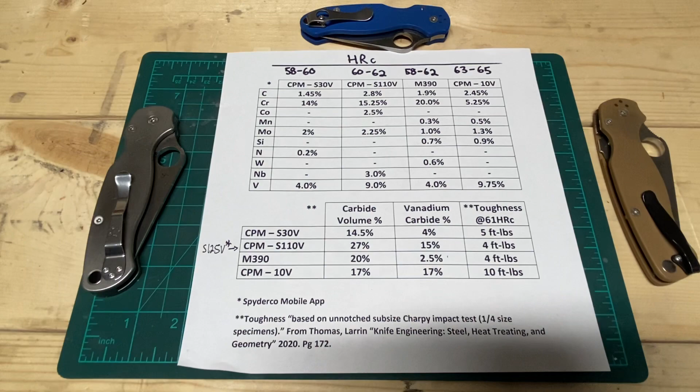S110V, made by Crucible. It is kind of the top dog in stainless steel right now, certainly whatever's done in production. I think it's been probably most popularized by Spyderco, which is what we have here, a Spyderco Paramilitary 2.

Spyderco does production runs of S110V in the PM2, Para 3, Military, Native Lightweight, Manix 2, and Manix 2 Lightweight, I think is all of them. So a lot of options. I don't know anybody else that's really working with it. I think manufacturers have kind of here and there, but nobody on the level of Spyderco, not even close.

So what's the deal with S110V? Why is it cool? Why is it not cool? And why might you want to pick it? Well, let's take a look.

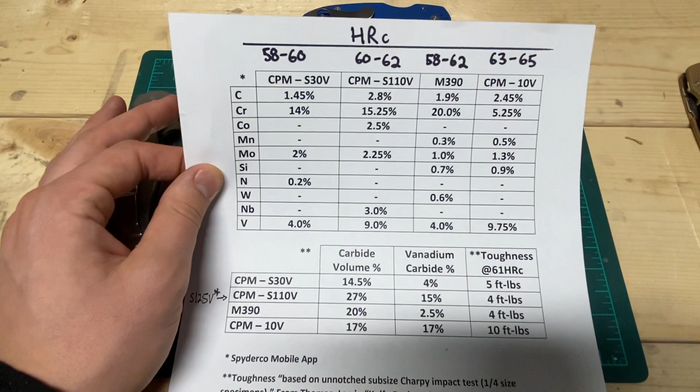So I smartly put S110V inconveniently in the middle instead of left to right, but we're going to work with it. So we're going to start with the composition. You're going to quickly see that S110V is not screwing around.

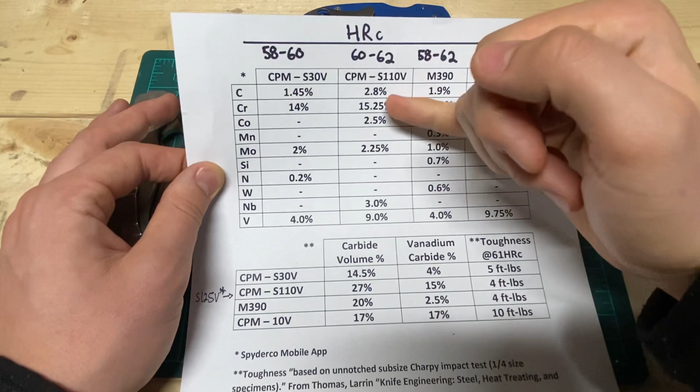So up front, we've got our carbon at 2.8 weight percent. And carbon is used for hardening the steel, of course, but it also is going to combine with some of the elements in here to form carbides.

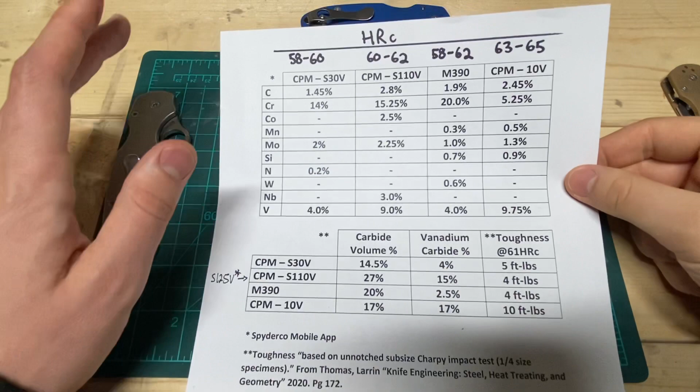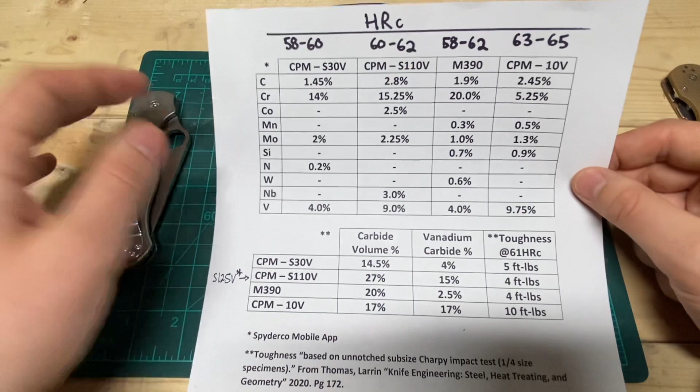We'll get to that. So you've got a huge dollop, 15.25% of chromium. That's going to be in large part for stainlessness, because the chromium that doesn't get bound into the carbides gets left out in the steel matrix so that oxygen can combine with it, making chromium oxide on the surface, and that's what prevents rust from happening.

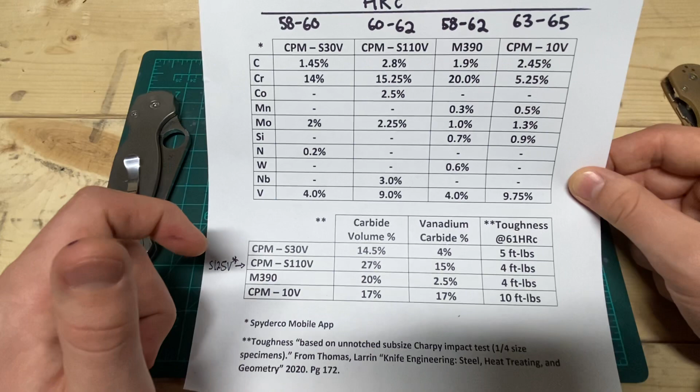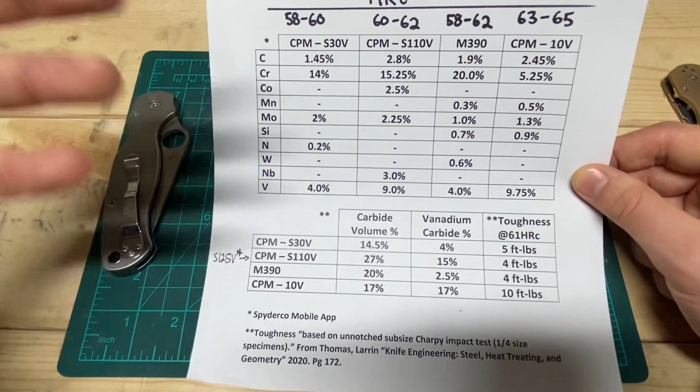You've got a little bit of cobalt here. I think that's added into the steel for a couple of reasons. One, I think, is it does help with heat treating the steel, making it a little bit easier to harden it. And number two is for hot working hardness.

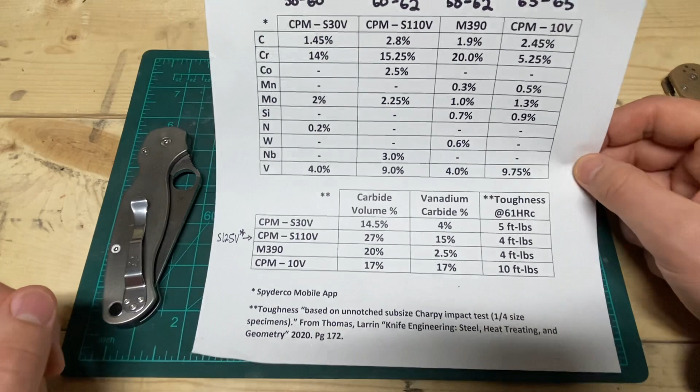S110V is a tool steel. I think people think of D2 when they think of tool steels, but this isn't meant for a knife. This is meant to be in some sort of drill bit or whatever—not drill bit, but tooling. So it's going to get hot, so they put a little bit of that in there to prevent it from softening when it heats up.

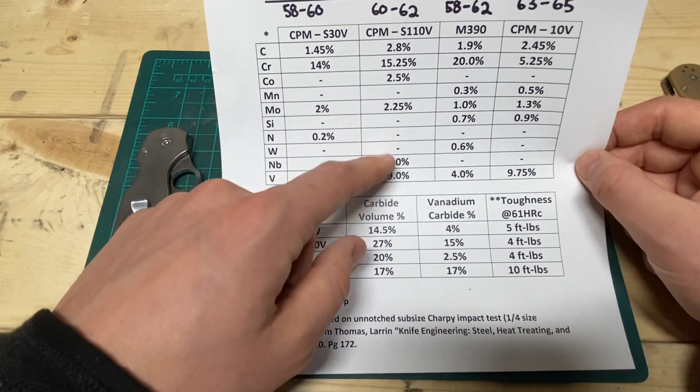Now you've got molybdenum. I think that's mostly for stainlessness. Once again, molybdenum is like chromium that'll add to stainlessness, but it won't soak up the carbon to form carbides quite like chromium will, not in these amounts anyways. I've never seen a super high molybdenum steel, honestly, past 4 or 5%.

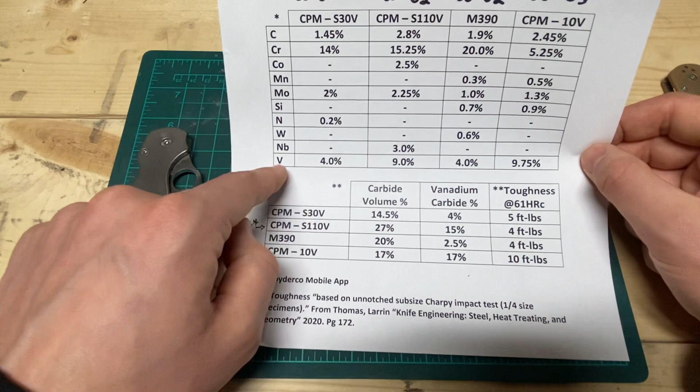Move all the way down to here to niobium. Niobium is a carbide former. It forms some of the hardest carbides and some of the finest carbides, just like its neighbor down here, vanadium, also just for carbide formation.

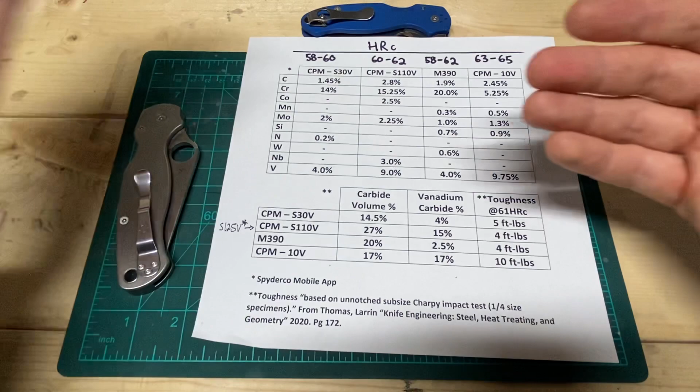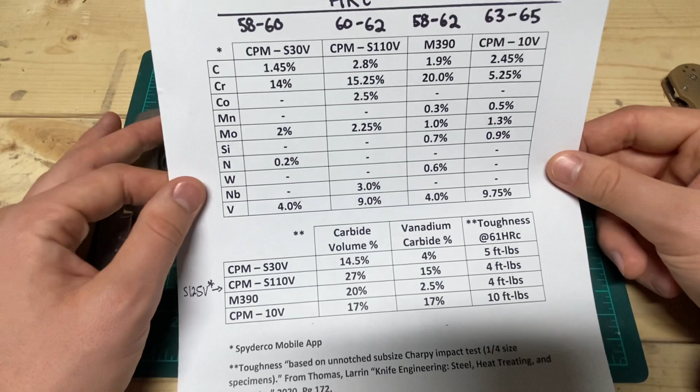And for those that don't know, all a carbide is when carbon, hence carbide, combines with another molecule—you just call it a carbide. But the bonds between the carbon and that other molecule are very strong, and you generate something that's super duper hard. And when you've got a very hard particle bound up in this steel matrix, it adds to wear resistance, because when you're cutting through cardboard, the cardboard can't abrade it very quickly. It slows down the wear, hence wear resistance. Generally, the more carbides you have, they'll add to hardness of a steel as well.

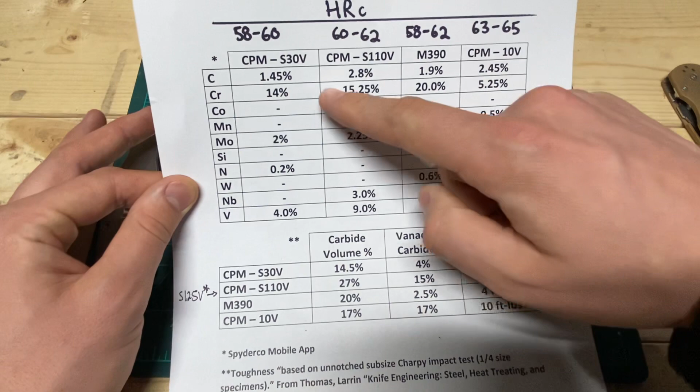So yeah, that's the composition there. Let's just kind of do a quick comparison to some of its neighbors here.

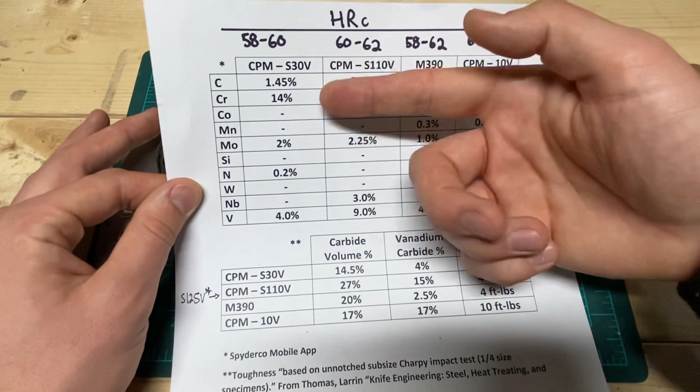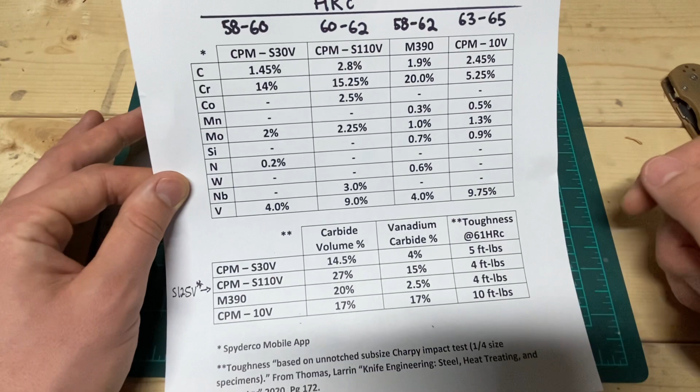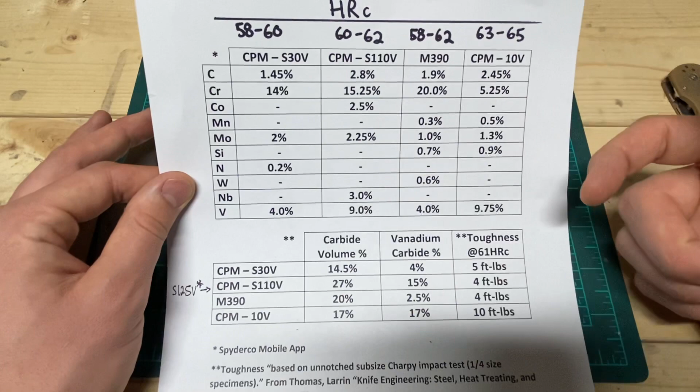So I've got S30V. Quick things to note: way less carbon. That means, as a ratio to the other things that'll soak up carbon, it has a lot less potential for getting hard and a lot less potential for forming carbides. It's got a similar amount of chromium, but less, and way less vanadium and no niobium. So you can see S30V just doesn't have the chemistry to form these ridiculous amounts of carbides, especially these hard carbides down here.

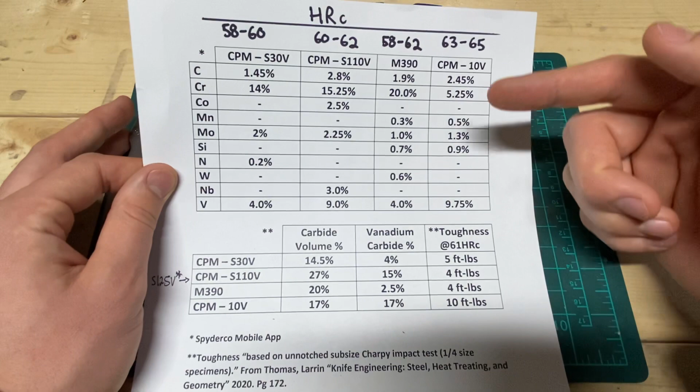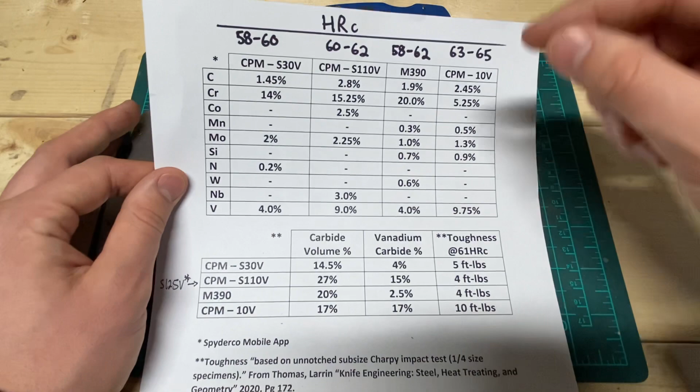Moving over to something like M390, which I think is a really good comparison to S110V. M390 is another steel that was developed as a stainless tool steel, and the intention was stainlessness.

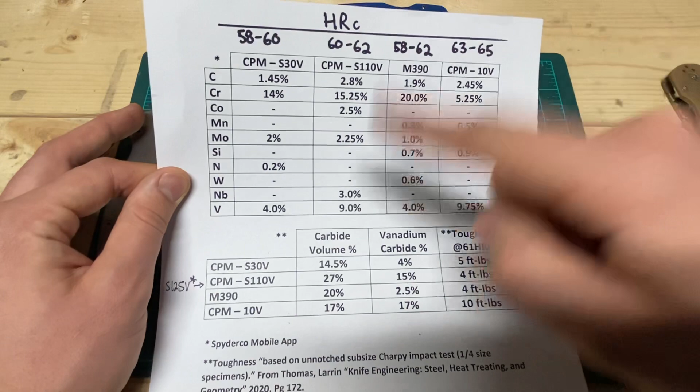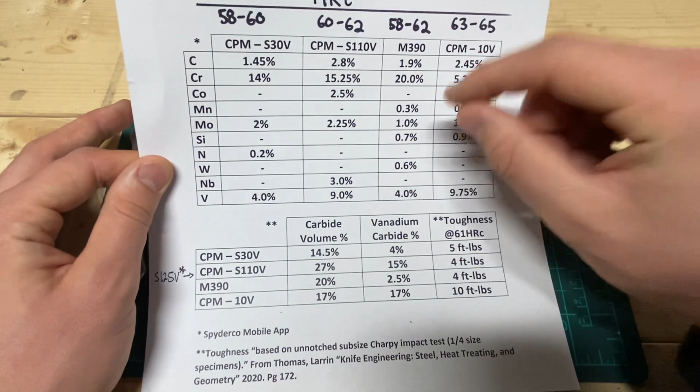But, and Larrin Thomas likes to go on—I don't know if I'll call it a rant, but he does not like M390, and it's for this reason: S110V was very well thought out in terms of maximizing stainlessness and wear resistance, whereas M390, they basically just threw a bunch of chromium into it without adjusting the amount of vanadium or carbon or anything. And what you get is a steel that has the potential to form lots of carbides, but it forms a lot of these chromium carbides.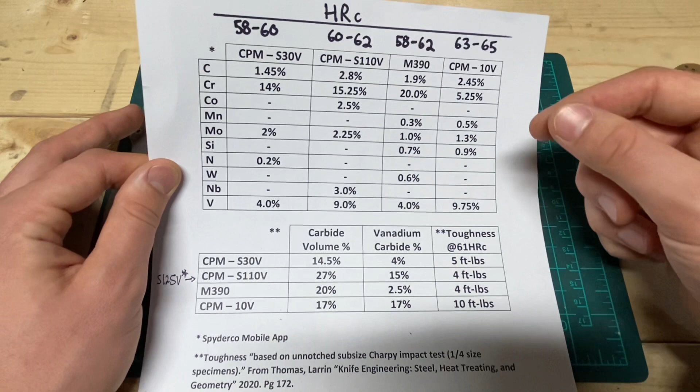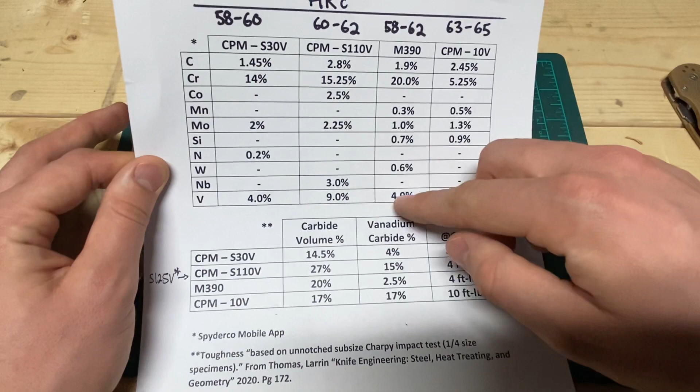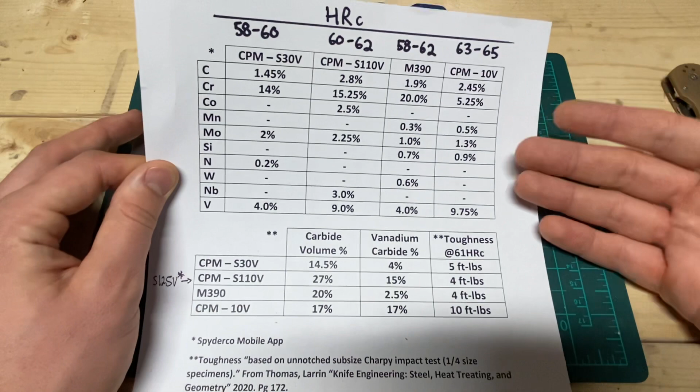The problem with chromium carbides is they are not nearly as hard as vanadium and niobium carbides, meaning you get less bang for your buck in terms of wear resistance. And not only that, for every carbide you form, you reduce the steel's toughness a little bit. But chromium carbide is a much worse offender than niobium or vanadium carbides. Because they went the route of all this chromium, you form a lot of these detrimental chromium carbides, whereas if they would have just formed something like these guys down here, they would have been a lot further ahead.

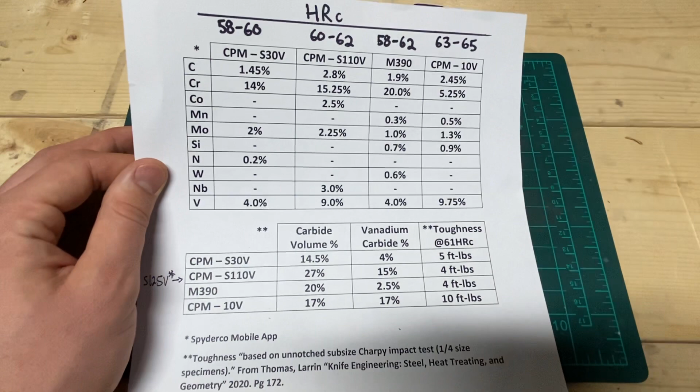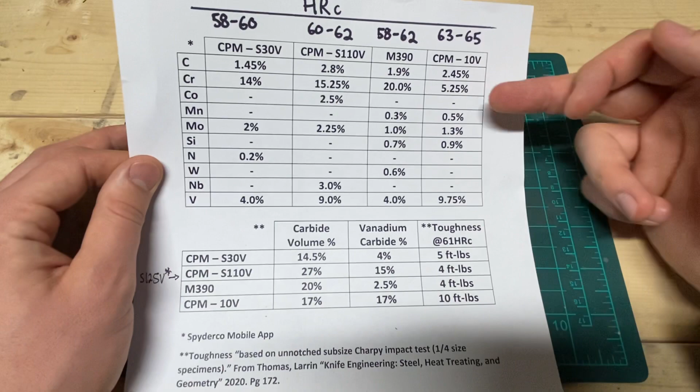We'll look at that down here. On to CPM-10V, that'd be this guy over here. So 10V is another tool steel. The 10V is the only one in here that's not — it was actually the first CPM steel. This is an example of what happens if you make this as good as you can.

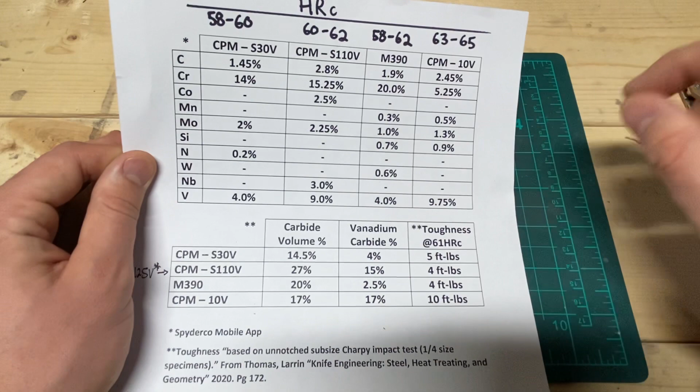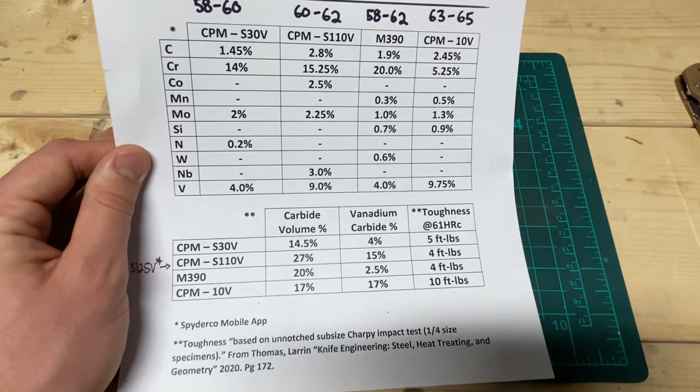Because when you make these steels stainless, you're compromising, because you're going to be forming those chromium carbides that reduce toughness and won't give you the same edge retention. So I wanted to put in something like S1 or CPM-10V, where it does have chromium in it, but it does not form chromium carbides at that level. Really this carbon is for hardness and to match up to this huge dollop of vanadium down here, forming a bunch of vanadium carbide.

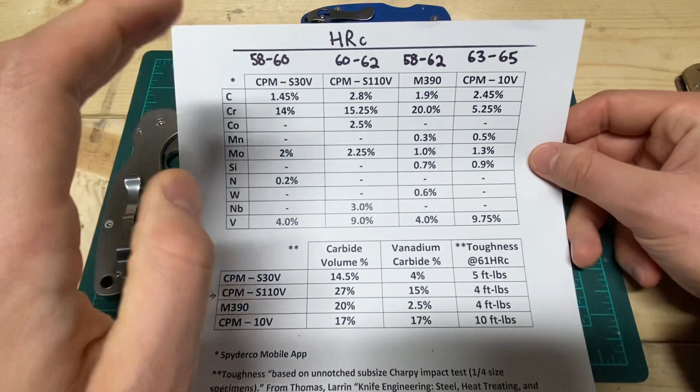That's kind of the chemistry breakdown. Let's look at the hardnesses I've got up there super quick. These are general factory heat treats that we see.

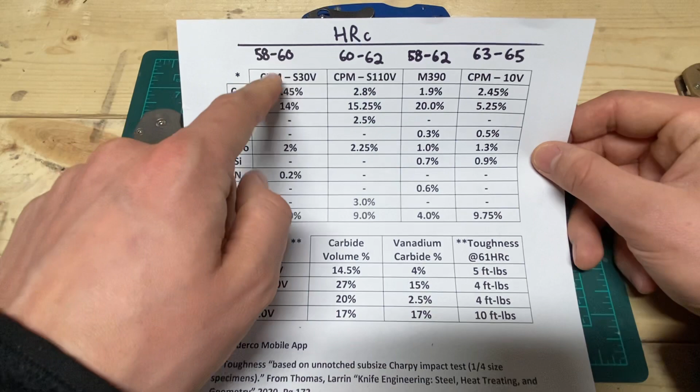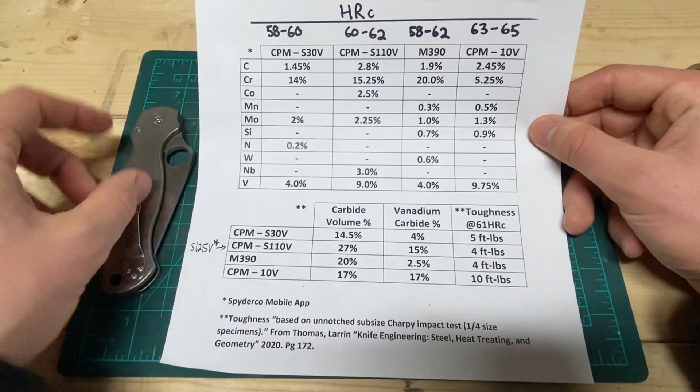Right off the bat, if you compare S30V to S110V, I'm basing this off what I see from Spyderco — they seem to always be above 60 on this, versus S30V seems to usually be running that 58 to 60 range. So if you're somebody that appreciates what you get out of hardness, which is longer wear resistance, thinner edges, more upfront sharpness, S110V is probably already going to be your good bet. And that's definitely what I've seen with this knife here.

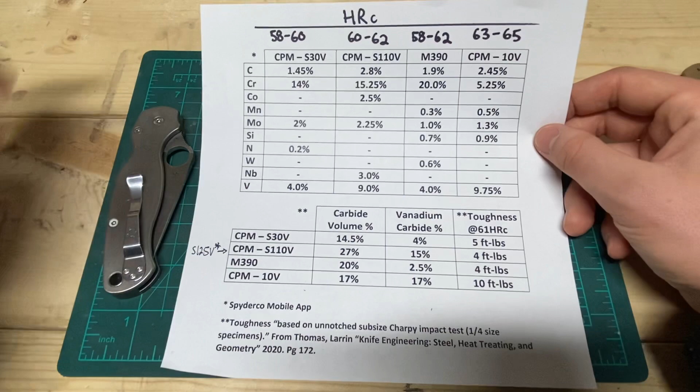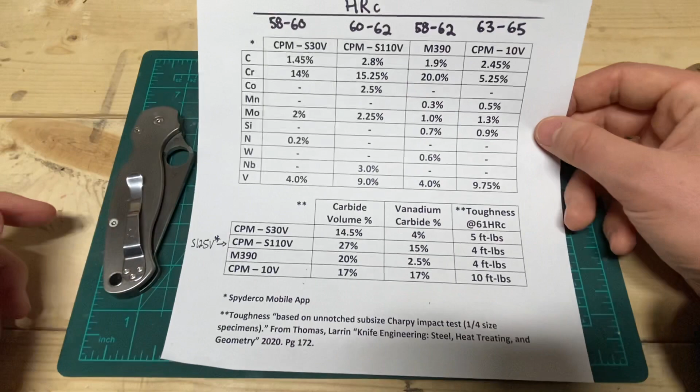M390, I see it in a wide range. I think a lot of companies do maybe even softer than 58 Rockwell, which is just absolutely pointless. But you do have some companies like, imagine that, another Spyderco — this one is probably in the 61 range, where it really does perform pretty well. But you have a wide range, so be careful with M390.

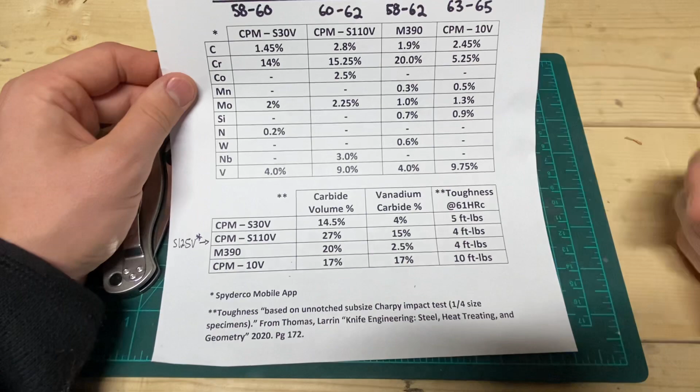In 10V, most people that work with it do it semi-justice, 63 to 65 Rockwell. I think this one's probably in the 63, 64 range. And you think, oh wow, that's so hard for a steel that has such high carbide volume. But now let's take a look down here.

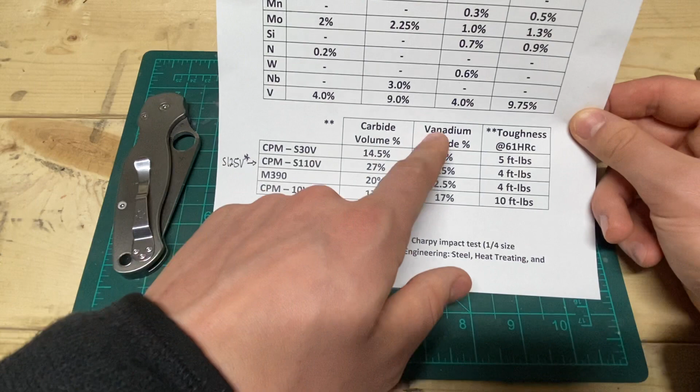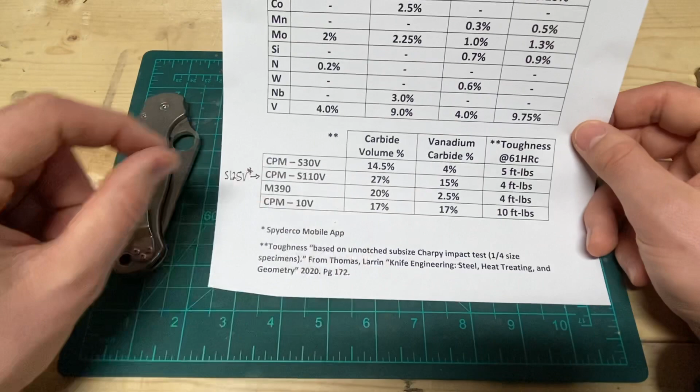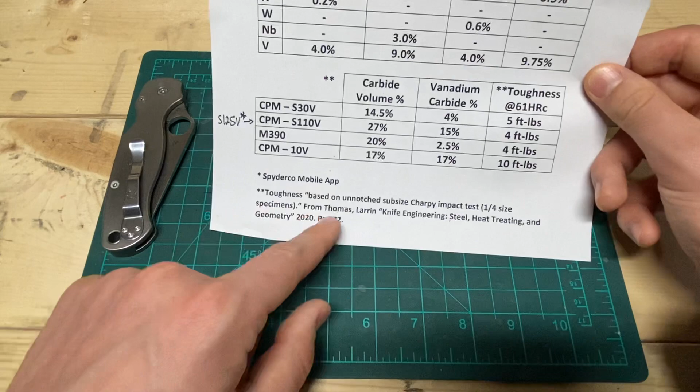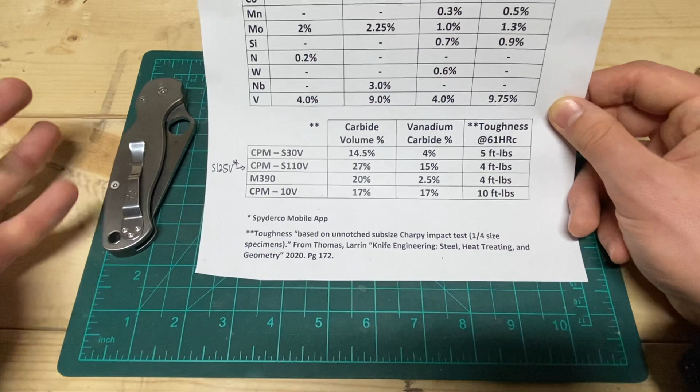So starting at S30V, I've got the total carbide volume here, and then this is the part of it that's vanadium or niobium carbides. Remembering that vanadium and niobium carbides are the more favorable ones that add more to edge retention and the least amount to toughness reduction. These are all estimates, by the way, with information from here. For S30V, you get 14.5% carbide volume, but only 4% is vanadium carbide. So it means you have 10.5% chromium carbide, and it's vanadium-enhanced chromium carbide, but I think that's outside the scope of this initial quick discussion.

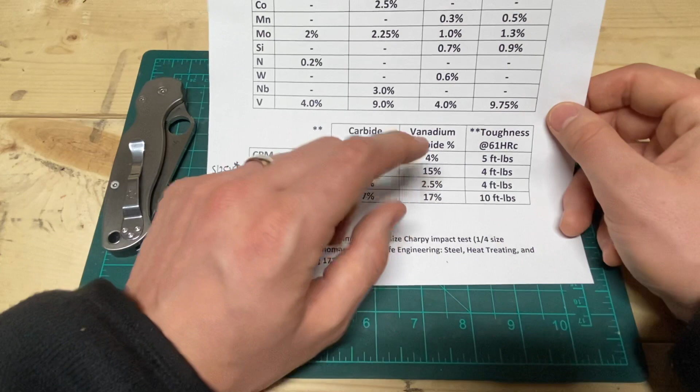So only 4% of that is actual awesome vanadium carbide. Look at S110V — you've got 27 total percent, and 15% of this is vanadium and niobium carbides. So they very carefully selected the amount of chromium, molybdenum, carbon, niobium, and vanadium to really maximize this number as high as they could.

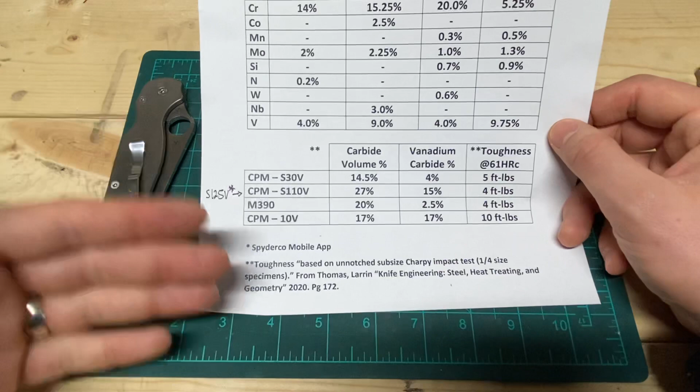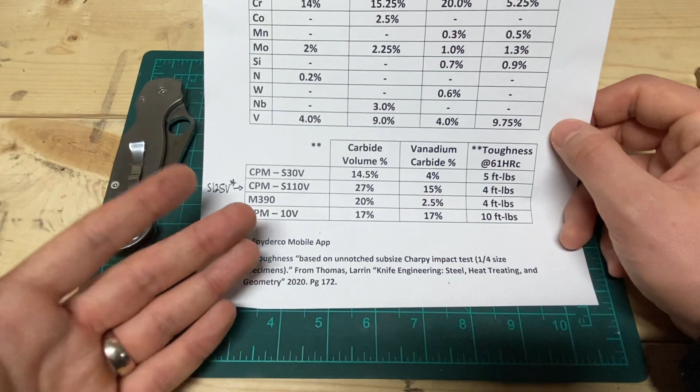I do want to note that these numbers here are from Larrin Thomas, but he notes that they are from ThermoCalc, and when he experimentally tested S125V, which should have higher carbide volume than S110V, these were the same numbers he got. So these are probably high estimates, just as an FYI, but they're probably relatively close. So as a fraction, only less than a third of S30V's carbide volume is vanadium carbide, whereas over half of S110V is vanadium carbide. So you can see what kind of an amazing accomplishment that is, honestly.

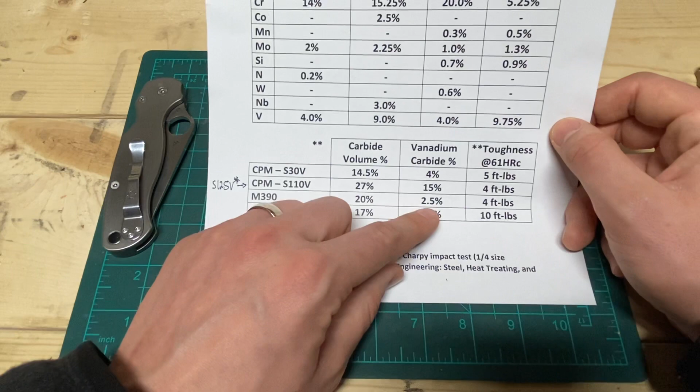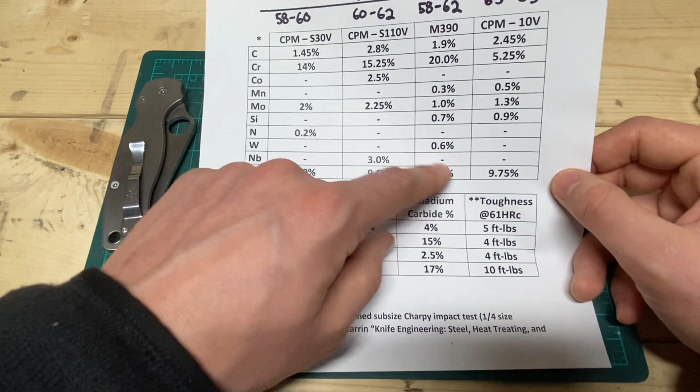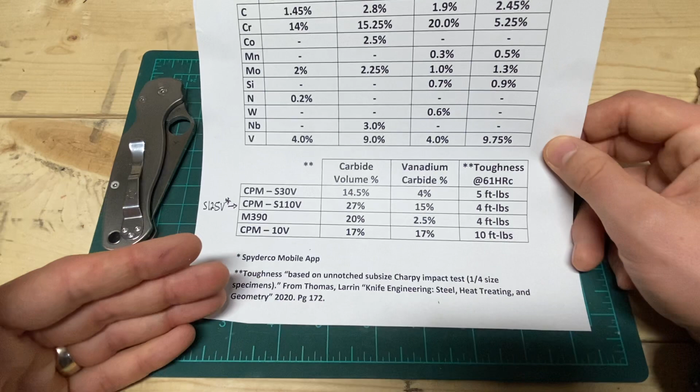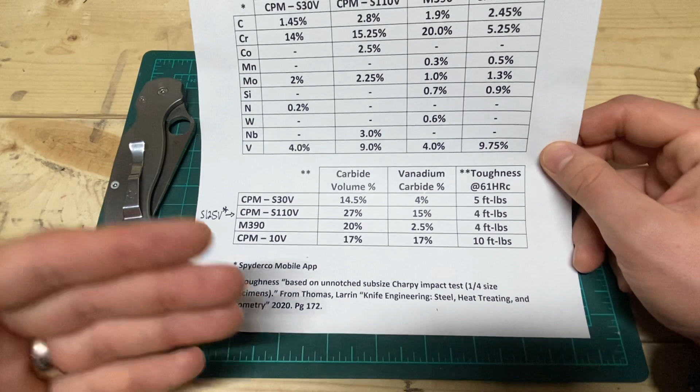And furthermore, let's look at M390, which is just atrocious. It's got 20% total carbide volume, so it will outcut S30V. But here's the deal — only 2.5% vanadium carbide. So it's actually got less vanadium carbide than S30V does. And that's because they so inefficiently designed this steel. It doesn't use all of that in making vanadium carbide. So it's just not a very efficient steel. It forms a lot of carbide, and it forms a lot of it as chromium carbide, meaning that for your dollar your edge retention is not going to be as good for that wear resistance level. It's just not an efficient ratio.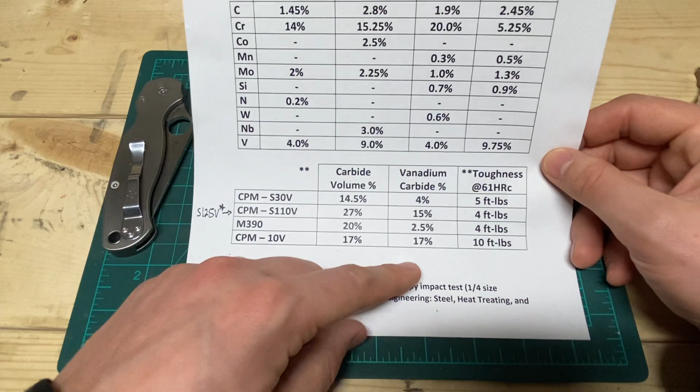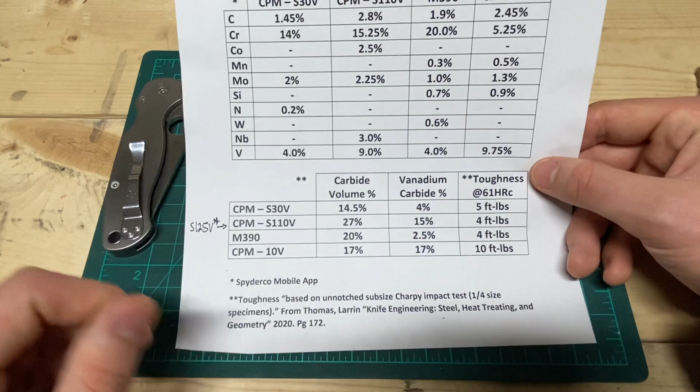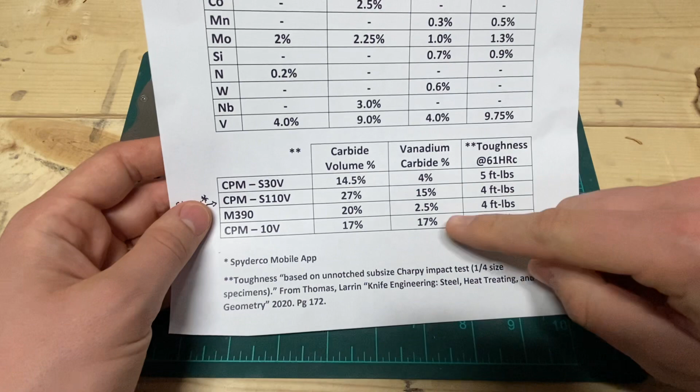And then down to CPM-10V, you've got 17% carbide volume, and every drop of that is vanadium carbide, and that's because it's designed that way. It has no detriment of having to finagle with chromium in there. All of these were designed prior to Magnacut, where they were perfectly balanced in terms of trying to maximize your vanadium carbide. So you can see that S110V really is in a class of its own. It has almost as much vanadium carbide as 10V does, which is just so impressive.

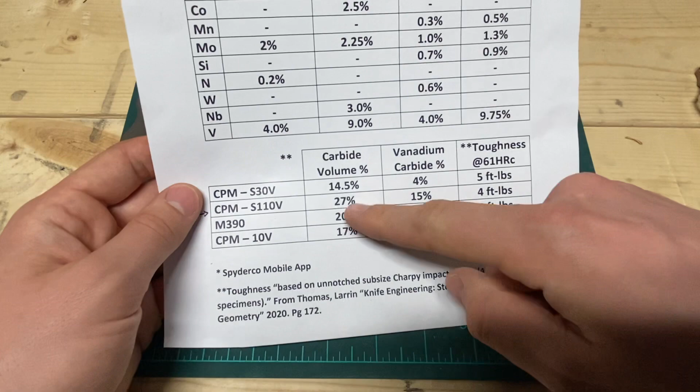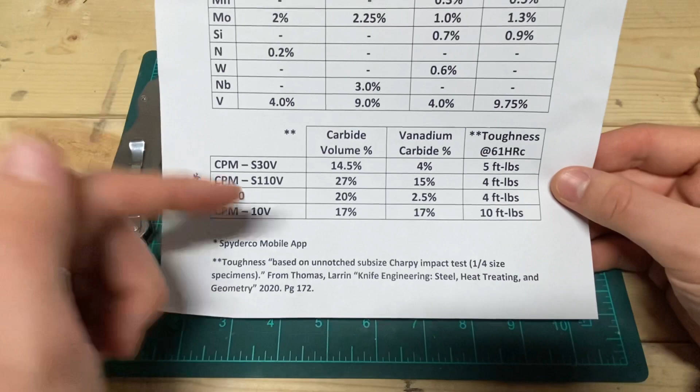Now let's move over to the toughness. These are all normalized to 61 Rockwell. You can see that S30V has about 5 foot-pounds. And you go down to S110V, which has double the carbide volume, a little bit less, but it only has a moderate sacrifice down to 4 foot-pounds. So once again, pretty marvelous what they're able to accomplish with S110V, to have that much carbide volume and only have that kind of reduction in toughness.

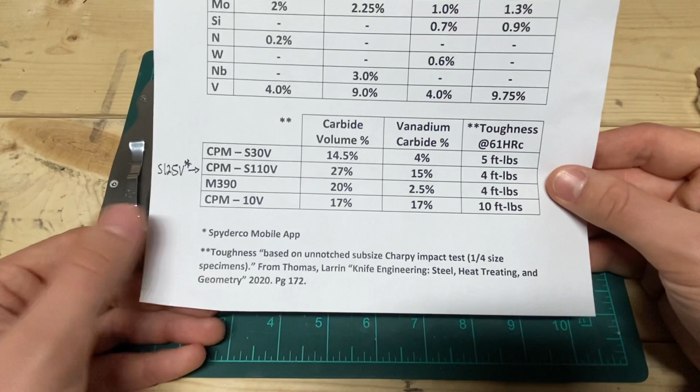It's really amazing. And now you look at M390, however, you have way less carbide volume than S110V. You have way less vanadium carbide than S110V, and yet it's the same toughness. That's because it's just not an efficiently designed steel. Does it perform well? It does, but are there steels that perform a heck of a lot better?

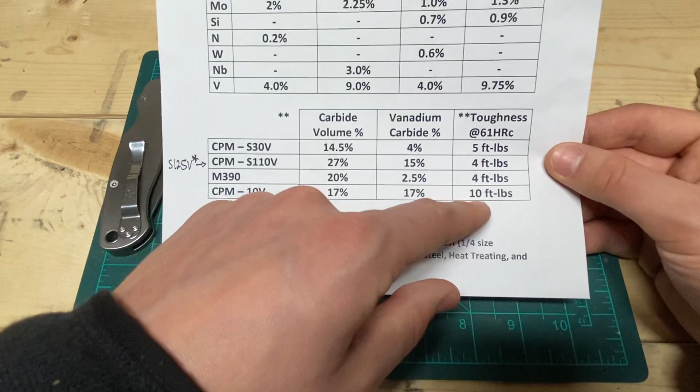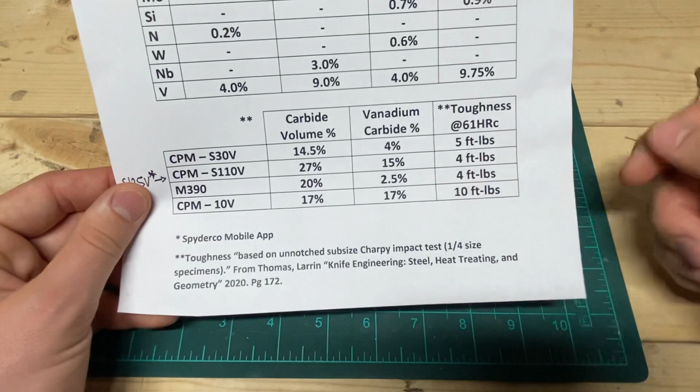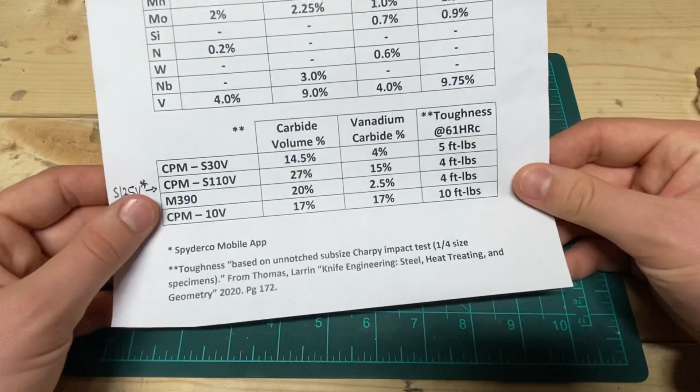Yeah. And then last is 10V. This is what you get when you don't go stainless - you get double the toughness of S30V at higher amounts of carbide. So that's the efficiency of going straight vanadium carbide - you get a way tougher steel, meaning you can go a lot harder, you can go a lot thinner edges. And that's why I prefer 10V the most out of this group here.

So that's kind of the science behind it, and I want to talk super briefly about the practicality of it. What is it like to actually use S110V? Up front, in my mind, I was kind of comparing this to S30V, because from Spyderco, it's really a choice you get to make. You can buy the base model S30V version, or you can buy the upgraded S110V version. And S110V feels and acts and performs in every way better than S30V.

Absolutely. The front end sharpness lasts longer. The working edge lasts way longer. It's a much higher quality working edge because that vanadium carbide develops that kind of working edge plus, is what I call it. Huge upgrade over S30V. Very notable. I don't see why you wouldn't choose S110V over S30V personally, but everybody's tastes differ.

I think two things are going to scare people about S110V - that hardness and that carbide volume, there's no way I'm going to be able to sharpen it. And that's one thing that really surprised me. I think these are hitting closer to 60 than 62. This did not feel very much different than S30V on the stones. It really didn't. It moved pretty quick.

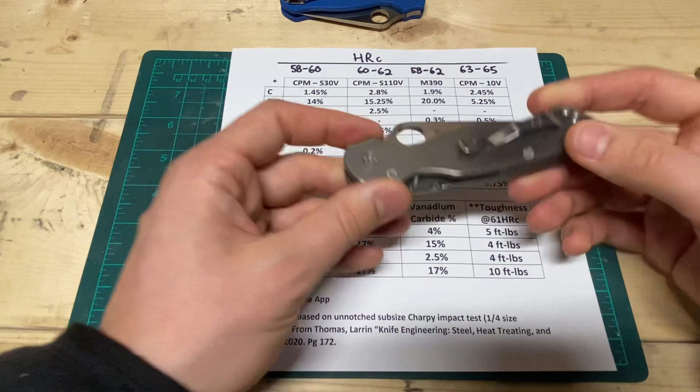Yeah, it feels a lot like S30V until the end. The stories of S110V not wanting to get as sharp at the very end are a little bit true, in the sense that S110V doesn't beg for a screaming edge like something like Cru-Wear seems to do. But S30V takes a sharper edge easier than S110V. You really got to do your work at the end to get that last little bit of sharpness, is what I found.

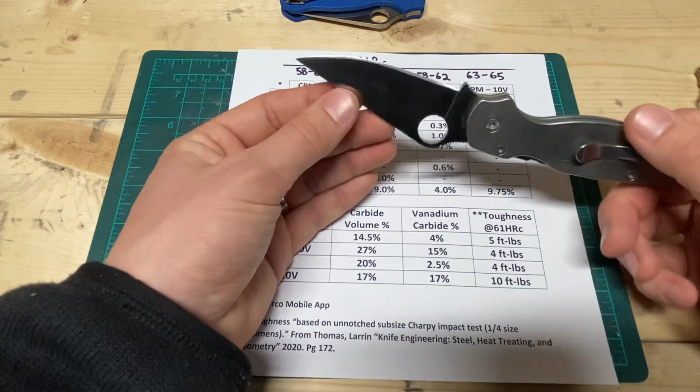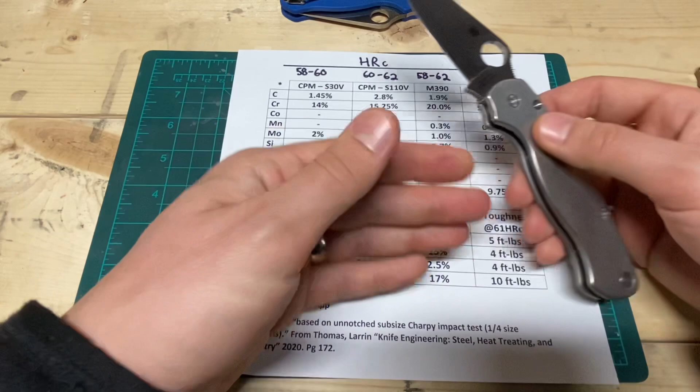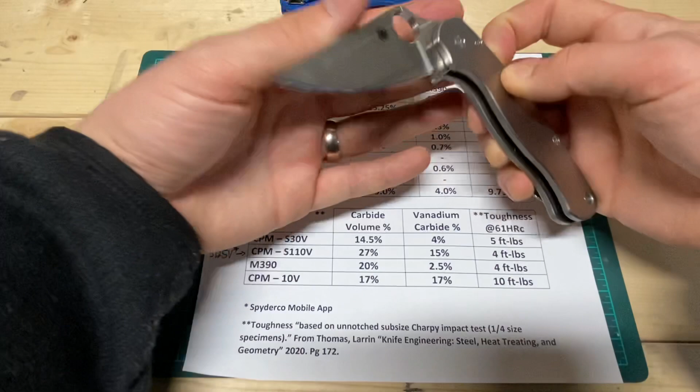Because I did 4 sharpenings on this total. The first 3 were my normal - just quick, whip it out, no big deal. I was able to strop it up to the sharpness that I wanted usually, but it wasn't quite where I wanted it to be. So on the last sharpening, when I sharpened it up to return it to who I borrowed this from, I really took my time. I went through a full progression. I don't know if you need to do the full progression, but I took my time, especially at the end, and it came up real beautiful, real sharp, real fine.

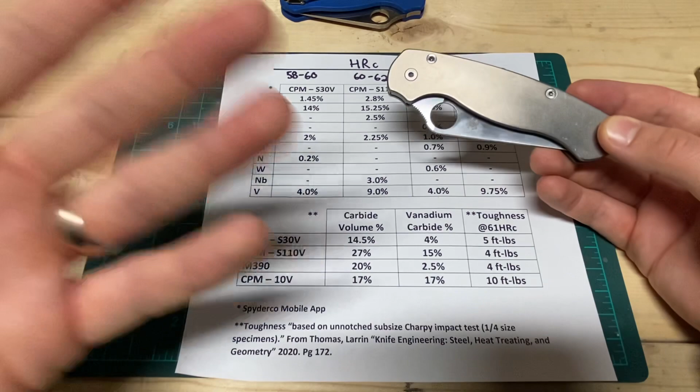So it definitely can do that, but it does take a little bit more work. So do I like S110V? For a stainless steel, I do like it. Do I love it enough where I would buy it personally? I don't think so. For me, when I think stainless, honestly, I usually go to LC200N because it sharpens up amazing. And if I want edge retention and high performance, I just go to 10V or K390. So for me, S110V is a worthwhile upgrade to S30V, and I do like it, but I personally won't be picking up any after I return this to its owner.